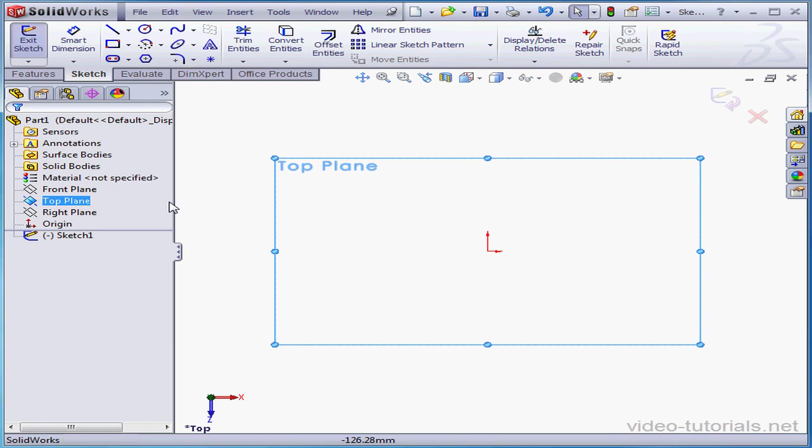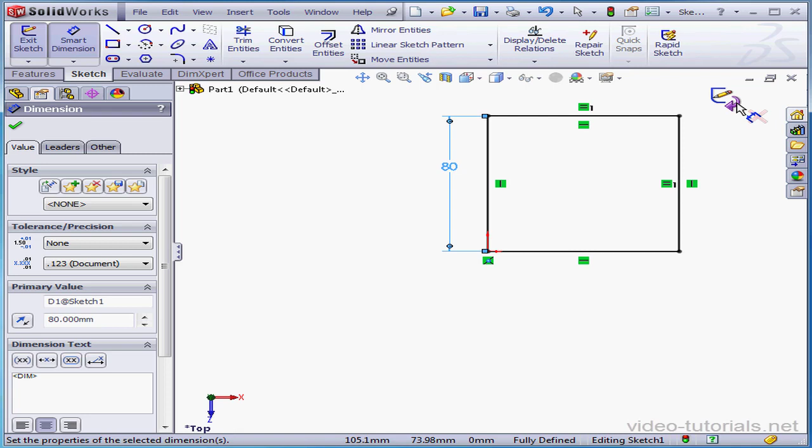Let's create a sketch on the top plane. In this lesson, I'll be creating a cube. There's my square. Right-click and select. Now I'm going to select these two lines and apply an equal relation. Smart dimension, 80 millimeters, let's say. Accept, and let's exit the sketch. Let's activate the Extruded Boss command, and we'll create a blind 80 millimeter extrusion. Accept.

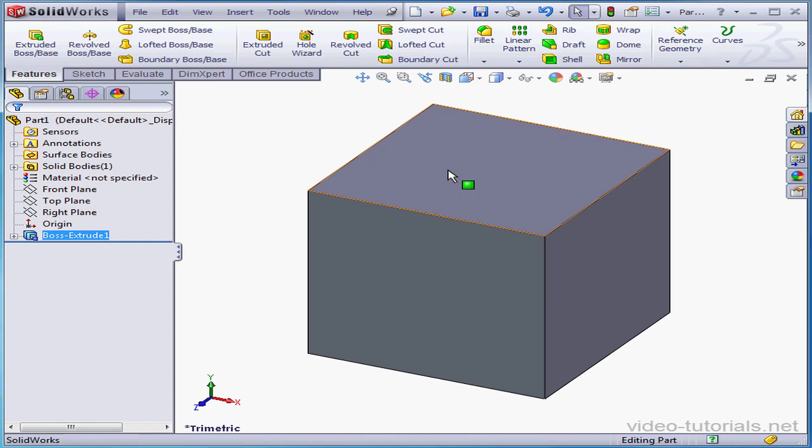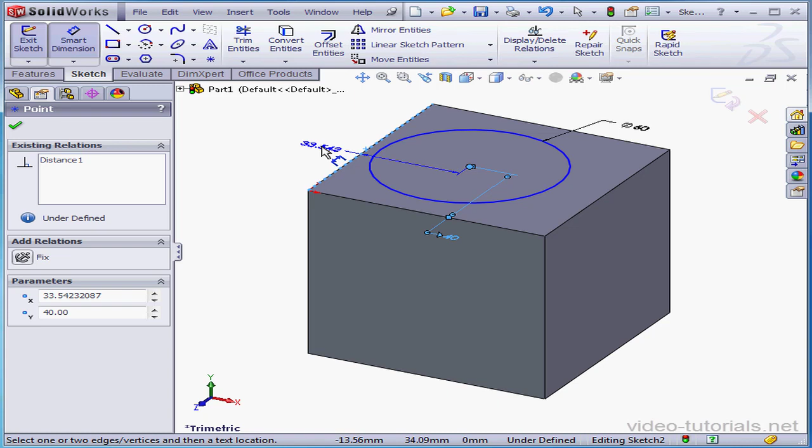Next, I'm going to build a 60 millimeter hole. It'll originate from this face and go through the entire solid. I also want it centered on this face. There are a few different ways we can do this. One way is to make the center of the hole 40 millimeters from this edge and 40 millimeters from this edge. Let's right-click, insert a sketch, and drop a circle here. Apply dimensions now, smart dimension. Let's specify the diameter to be 60 millimeters. OK, and now this dimension will be 40 millimeters, and the dimension between the center of the circle to the opposite side will also be 40 millimeters. Accept, and let's exit the sketch.

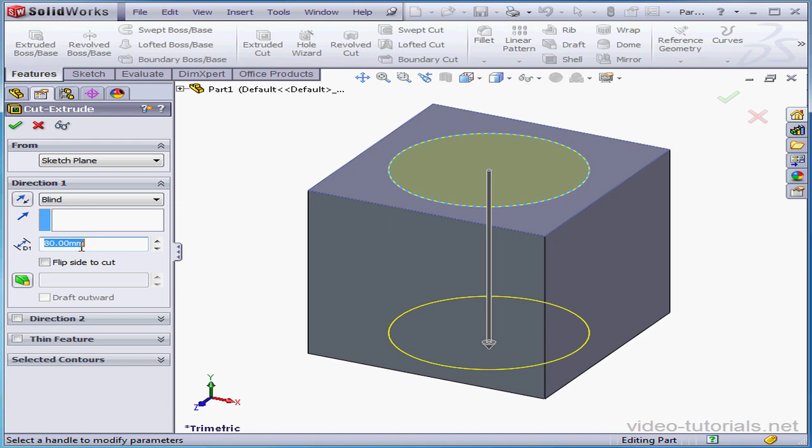When the sketch is selected, activate the Extruded Cut command. As you see, the options here are very similar to those of the Extruded Boss. I'm going to use a blind cut of 80 millimeters in depth and click OK. Here's the cut, which goes through the entire solid and originates at the center of this face.

Let's activate Instant 3D. Double-click on my model, and let's change the dimensions of the solid a little bit. Let's make this dimension 120, and this dimension 90 millimeters. And just pan a little bit. As you can see, the hole is no longer centered, nor does the cut go all the way through the solid. So let's learn how we can fix this situation.

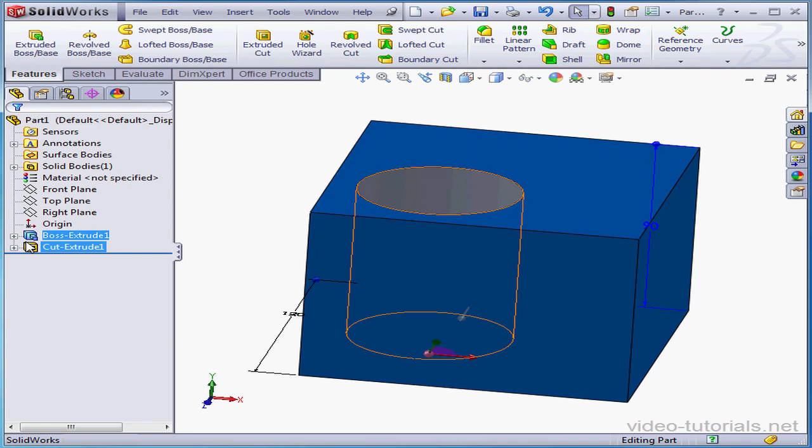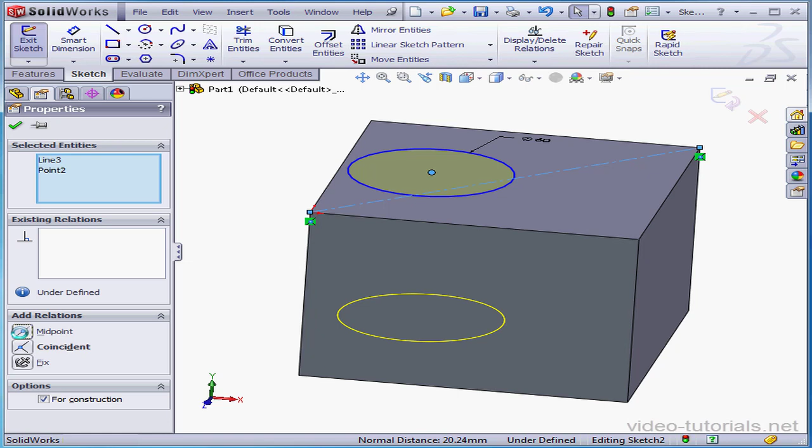There's definitely a way we can create this part that will accommodate the need for potential resizing. Let's modify Sketch 2, right-click, Edit Sketch, and delete these dimensions. Now let's move the circle a little bit and add a construction line between this point and this corner point. Right-click and select to close the tool. Since the end of this construction line is attached to existing geometry, the line is fully defined already. I'm going to Shift-select my construction line and the center of the circle and add a midpoint relation.

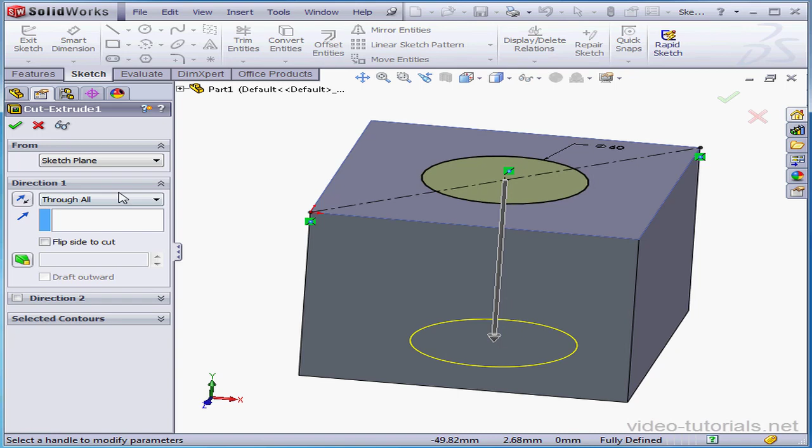Let's accept and exit the sketch. Now my hole is always going to stay at the center of this face, no matter the size. Let's right-click on Cut Extrude 1 and select Edit Feature. Under End Condition, instead of Blind, I'm going to select Through All. Let's accept. Now our hole goes through the entire part.

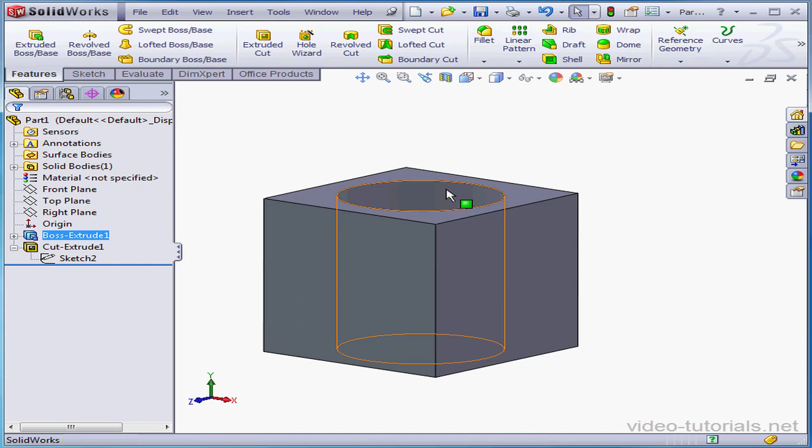Let's double-click on this feature, select this dimension, and change it back to 80 millimeters. Select the other dimension back to 80 millimeters as well. As you see, the hole is still located at the center of the face, and it still goes all the way through. Now, when I change the diameter of my hole, it remains centered. Let's snap back to 60 millimeters. Take an isometric view.

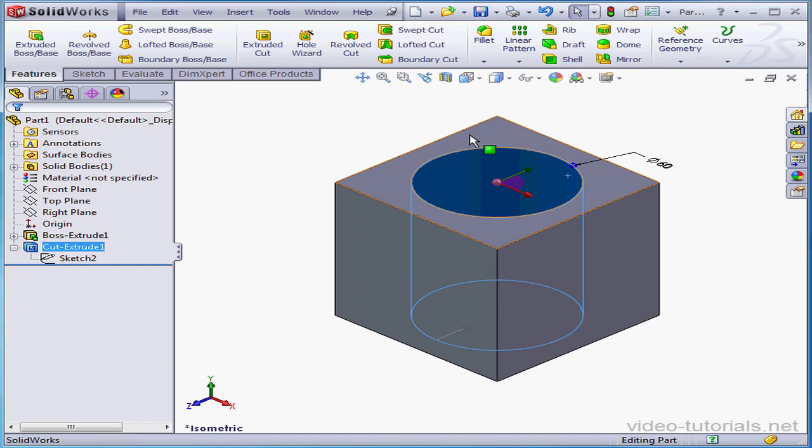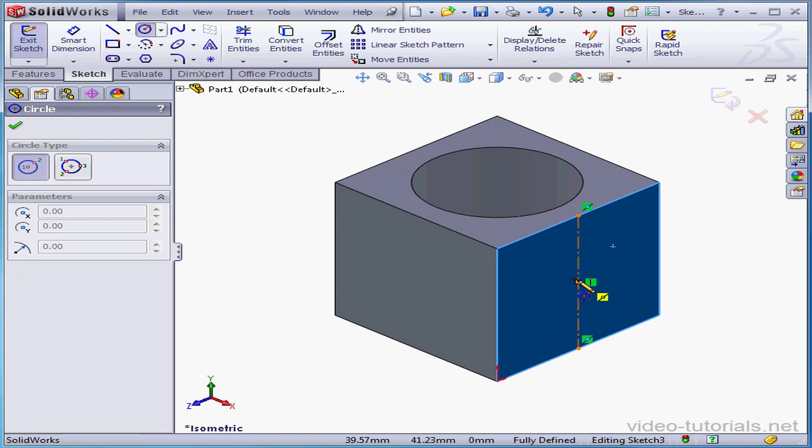I'd like to create another hole originating in the middle of this face this time. Right-click, Insert Sketch, activate the Centerline command. Let's create a construction line from this point to the midpoint of this line. Right-click and select. Now let's drop a circle here. I'll just scratch the line to awaken its midpoint, and then I can apply a coincident relation automatically between the center of my circle and this line.

Let's apply dimensions, 40 millimeters for the diameter of the circle. OK, and the sketch is now fully defined, appearing in black line. Let's exit and activate the Extruded Cut command. Our cut will be blind, 40 millimeters in depth, and accept.

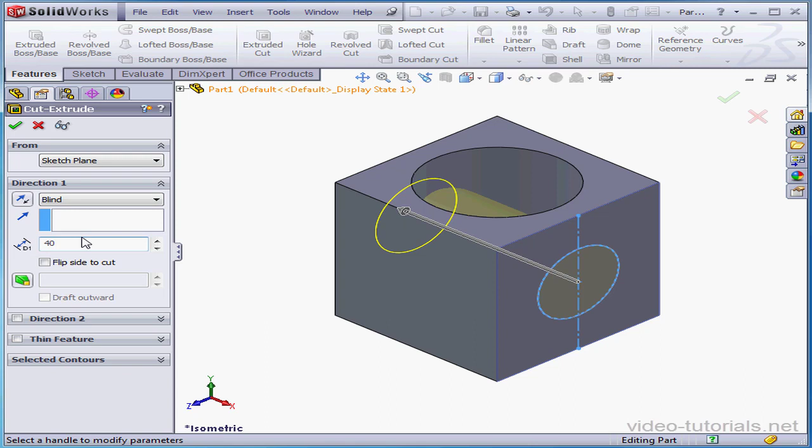Next, I want to create a sketch on a face that isn't currently visible. Let's right-click and select Other. With this face selected, go to the Sketch tab and select 2D Sketch.

Once again, I'm going to use a construction line between this point and this point. Right-click and select. Notice that I'm able to select entities now right through the solid. Let's create a rectangle now using the center rectangle method.

I'll give this line a mouse scratch to awaken the center point. There it is. Left-click when you see it. I'll drop my rectangle about here. Right-click and select. Let's shift-select these two lines and add an equal relation.

Apply some dimensions now. Let's make this dimension 70 millimeters. OK, and we're ready to exit this sketch.

Let's go to the Features tab now and activate the Extruded Cut command. From the End Condition drop-down menu, let's select Up to Next, and then Accept.

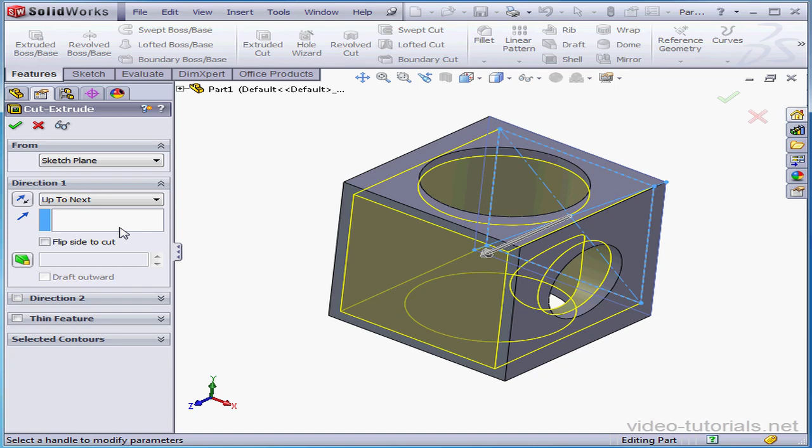Since this hole is wider than the hole originating at the top, this extrusion goes through the entire model up to this face.

Let's edit our sketch. Let's change this dimension here to 60 millimeters. Click outside the box to accept.

Now the hole goes up to this face.

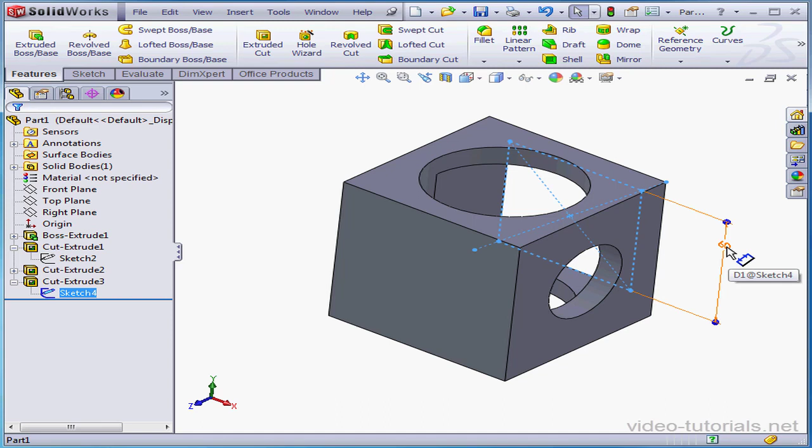If I select the sketch and double-click the dimension, let's turn Instant 3D off. Okay, now we can double-click the dimension and open the input box. I'm able to change the dimension here and click OK. However, if I do that, I've got to hit Rebuild in order to make the changes take effect.

Let's create an extrusion originating from this sketch. Right-click on this face, New Sketch. Let's activate the Line tool.

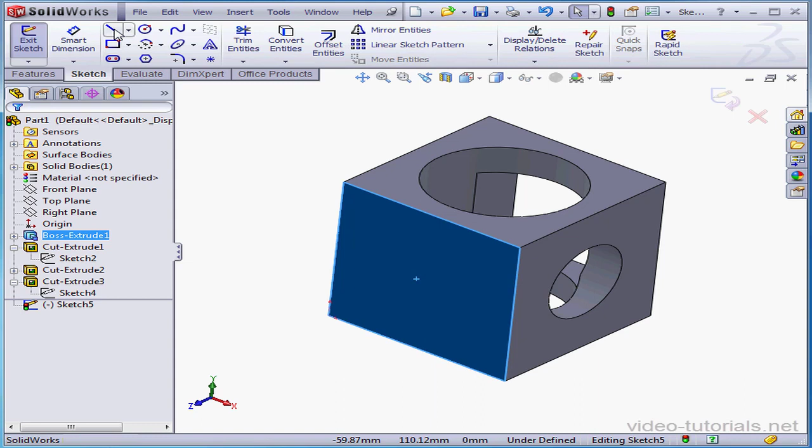Let's awaken the midpoint of this side and connect it to this midpoint over here. And let's exit the sketch.

With Sketch 5 selected, let's activate the Extruded Boss Base command. SOLIDWORKS asks me if I want to close the sketch with model edges. Let's click No. Now the only available option here is the Thin feature.

Let's specify the thickness, say 10 millimeters. The thickness type will be in one direction. Let's make our extrusion 60 millimeters in depth and accept.

And let's create another hole. We'll need to start with a sketch on this face. Insert Sketch, activate the Centerline command. We'll create a construction line from this corner to this corner.

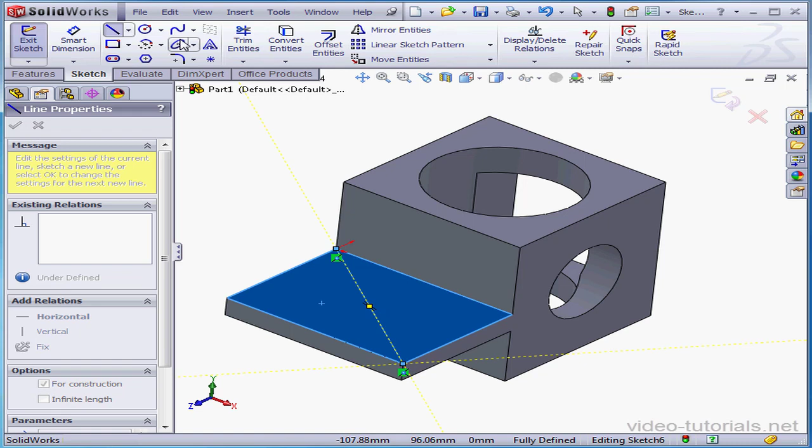And a circle now. Let's apply dimensions. Do we want to leave it driving? Cancel out.

Now let's dimension the diameter of the circle. Let's say 40 millimeters, and let's exit the sketch.

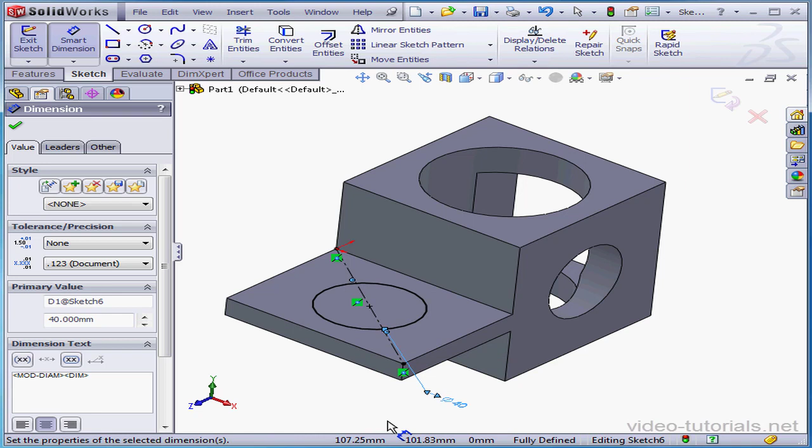Activate the Extruded Cut command. Let's check Thin Feature to activate this control area. For type, we'll use midplane. 10 millimeters is fine. Let's accept.

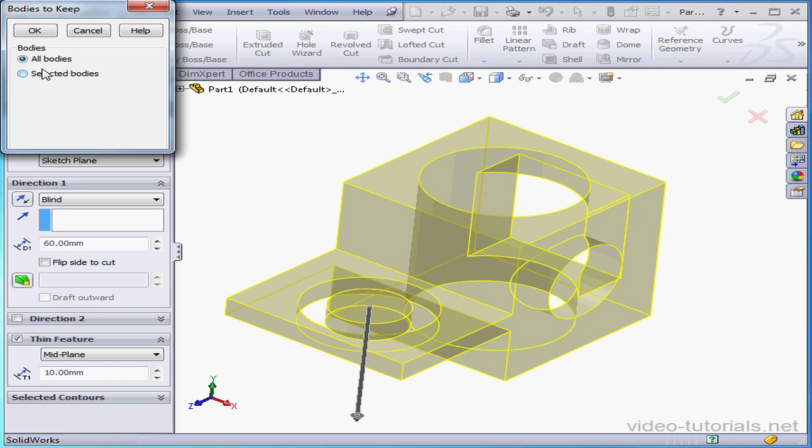Now SOLIDWORKS asks which body we want to keep, body 1 or body 2. I'm going to select all bodies. OK. Now we have two solid bodies in our Feature Manager design tree.

Let's try to edit Cut Extrude Thin 1. Right-click, Edit Feature. Notice that SOLIDWORKS won't let me disable the Thin feature area now. Let's cancel out of the Property Manager and let's delete this feature.

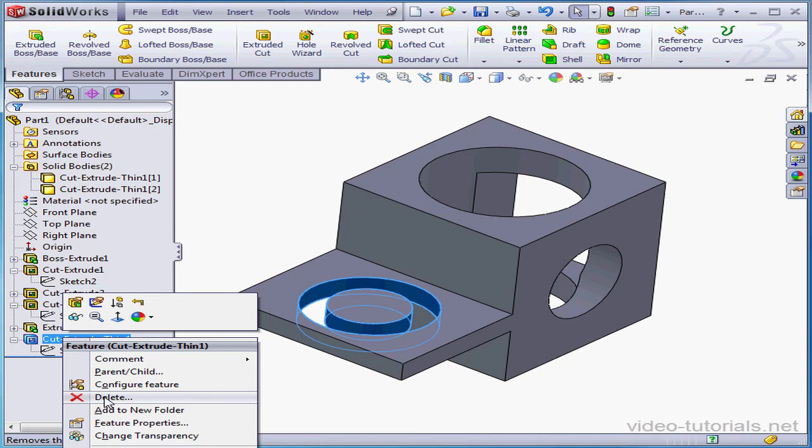But I do want to keep Sketch 6. Right-click on the Thin feature, select Delete. In order to keep the sketch, I need to uncheck Also Delete Absorbed Features. Let's uncheck this option and click Yes.

Now let's activate the Extruded Cut command again. Oops, Extruded Cut. Select Sketch 6. I'm going to accept the default settings.

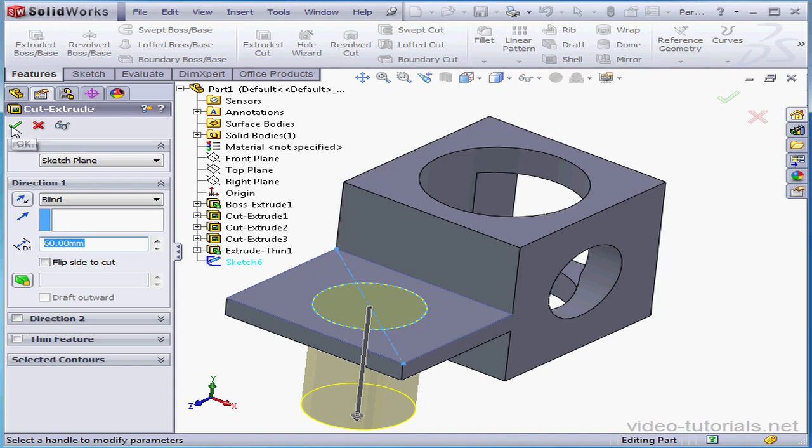Now let's edit the feature. Right-click, Edit Feature. Now the thin feature control area isn't even visible in the Cut Extrude Property Manager. Let's cancel out of the Property Manager.

And this concludes our lesson about working with the Extruded Cut command. Go ahead and save your work.